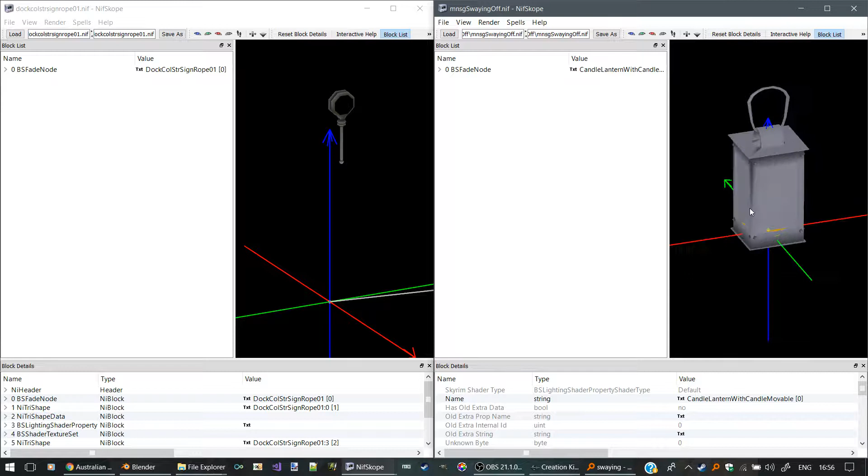Now we've got a few things open. We've got a swaying lantern from my lanterns mod, a piece of rope from the creation kit, and an ETAC lantern that we want to put on the end of that rope to make it sway. So let's start with this rope.

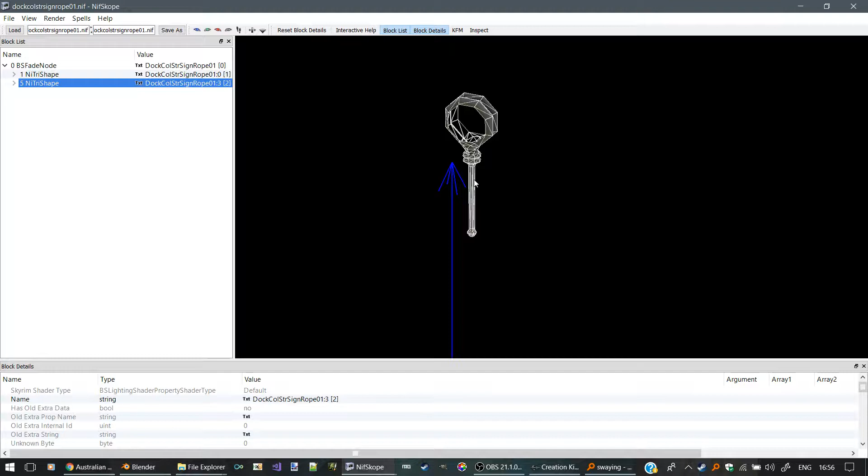We need to split this up because we don't want the whole thing to sway, just the stick of rope at the bottom, while the top remains static. So first we'll check the transformations, and that's quite horrible.

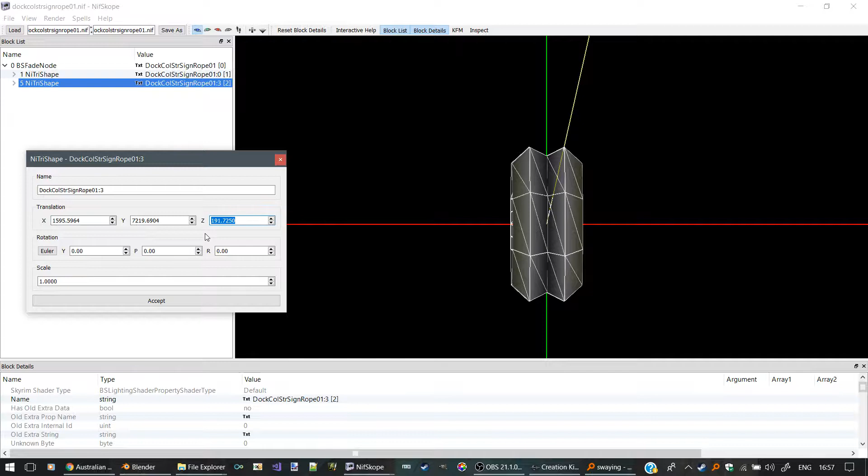If we export these numbers into Blender, or this model into Blender, it will be very hard to work with. So we'll move this into the middle, like so. Okay, how's that? That's pretty good. And then we'll apply that transformation.

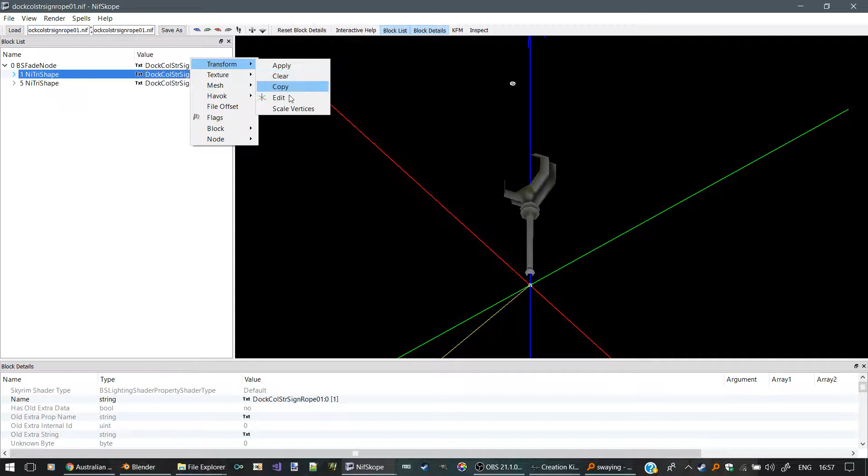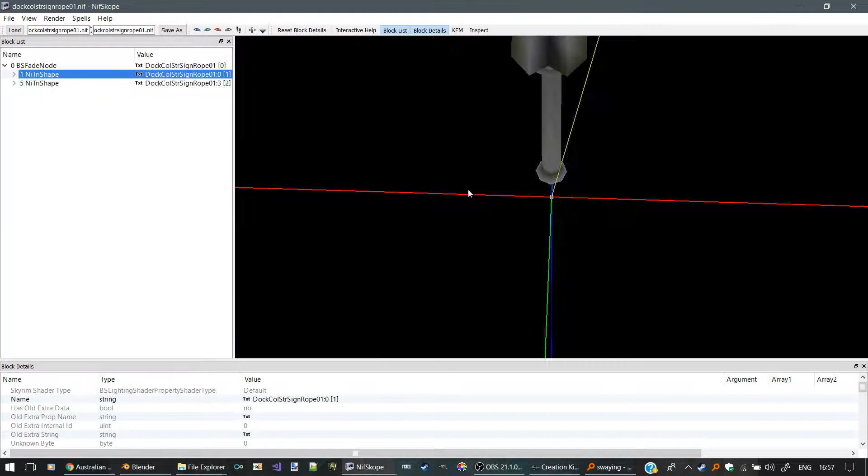Now there's also a little end cap that goes here, currently stuck up there. So let's try and grab that. I'm not too worried about this little thing, but if you were doing this carefully, it would be important to make sure you got all the elements of the mesh that you wanted. Okay, there we go, that's pretty good.

But we'll just be sticking with this big piece for now. So we want to export that. Okay, my new rope object. We'll copy over that, and then we'll bring that into Blender.

My new rope, make sure the axes are right. Okay, there it is. Now we want to get into that, and we want to split this up. So let's take all of these points and we'll separate those out to a separate object.

Okay, we'll stretch these up a bit, and we'll stretch this side down a bit, and that's just so that when it sways, we won't have any big gaps opening up between the two rope elements. Okay, so let's get these back into NifSkope.

Export as 3ds. Here's the top, and we want only that selection. And the bottom. Here's our bottom. Okay, so we've got our two elements now.

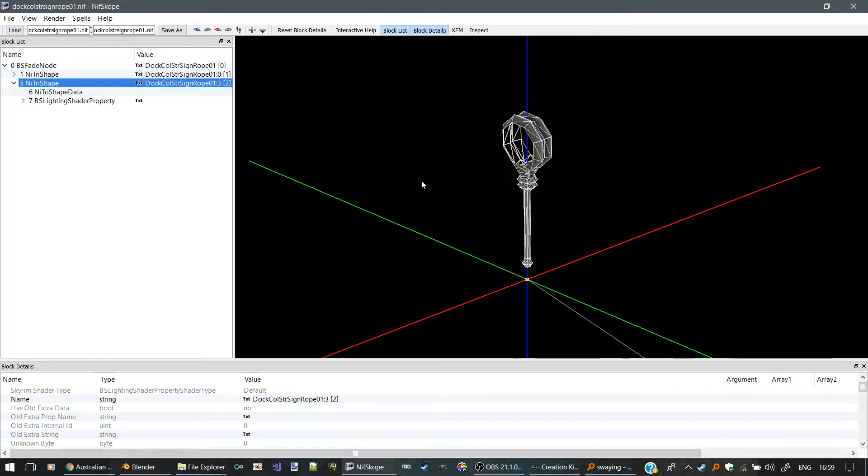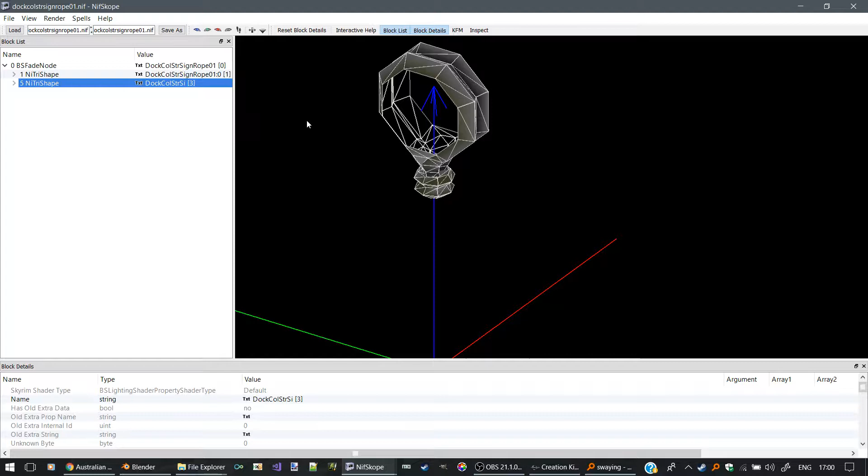Okay, and let's bring one of them back into here. Bring in our top element. Right, there's our top element, and we want to keep that handy because that's going to be our static element that goes at the top.

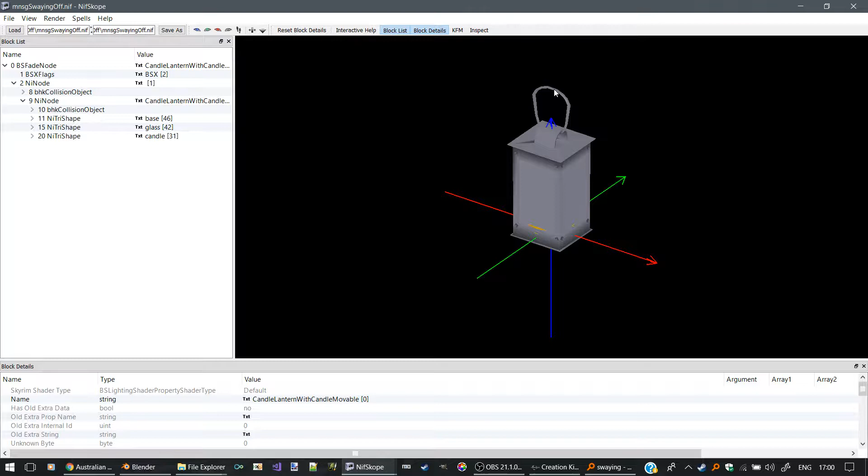Now let's have a look at our lantern here. And I know that when my lantern sways, the pivot point is up here, just inside the loop. So I want to keep that lantern case in there for as long as I can so that I can use that as a reference.

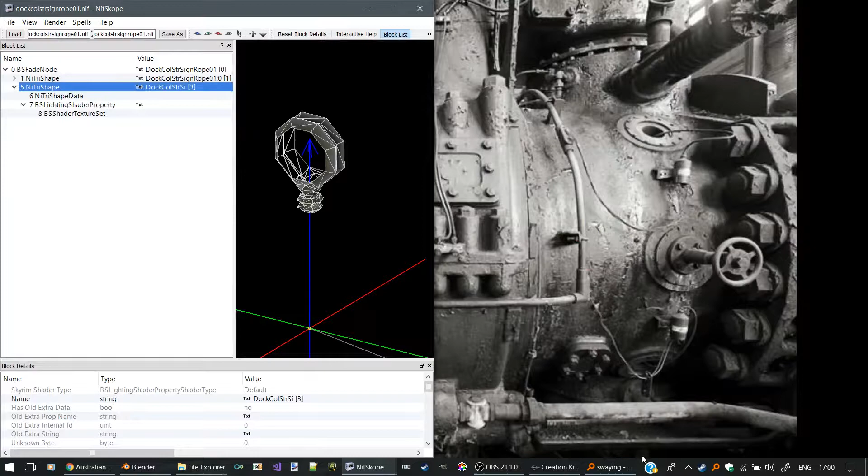But I can get rid of the candle, and I can get rid of the glass. Okay, whoops, oh wrong one. All right, let's open that again. Okay, get rid of the glass. Get rid of the candle. Okay, there's my case.

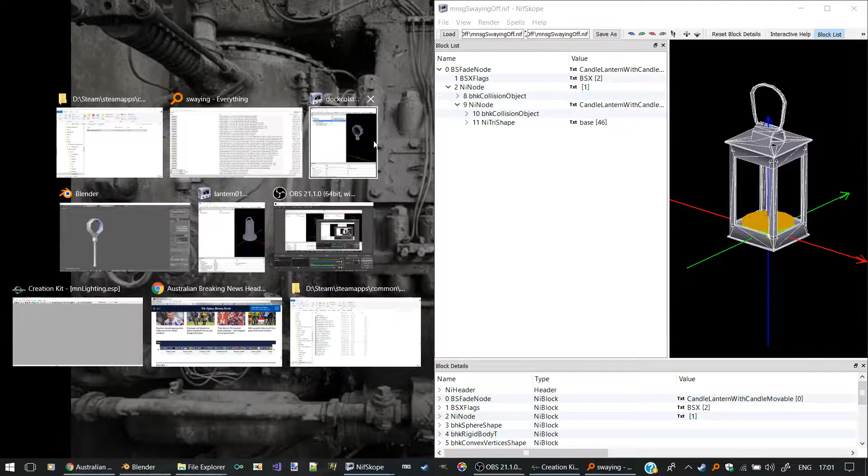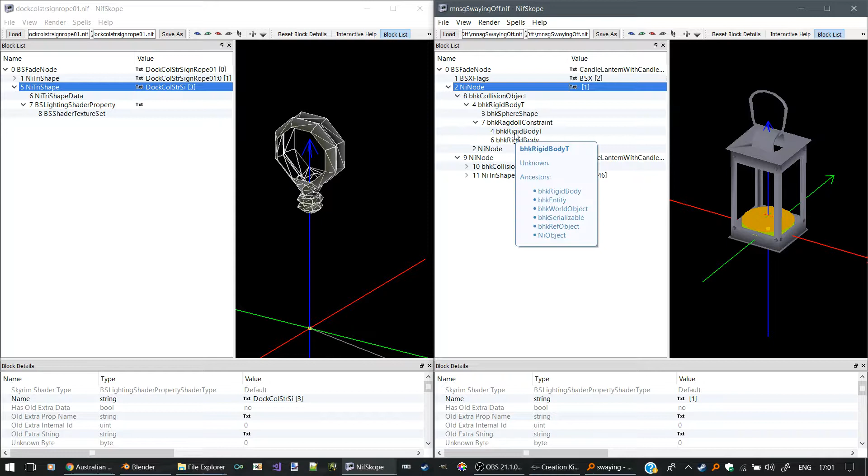Now over here we can see we've got our top node and we've got our object node. The object node includes our ragdoll, that's the disk there, that indicates a ragdoll. And it has our actual lantern object. That means that any objects we put under this node are going to be subject to the constraints of the ragdoll, and anything outside that will not be part of the ragdoll.

So if I go to my rope, I can copy that block. Okay, whoops, I'll have to update those arrays first. Okay, array update, update my normals, update my tangents, update my bitangents, and update my vertex colors. Okay, let's try that again.

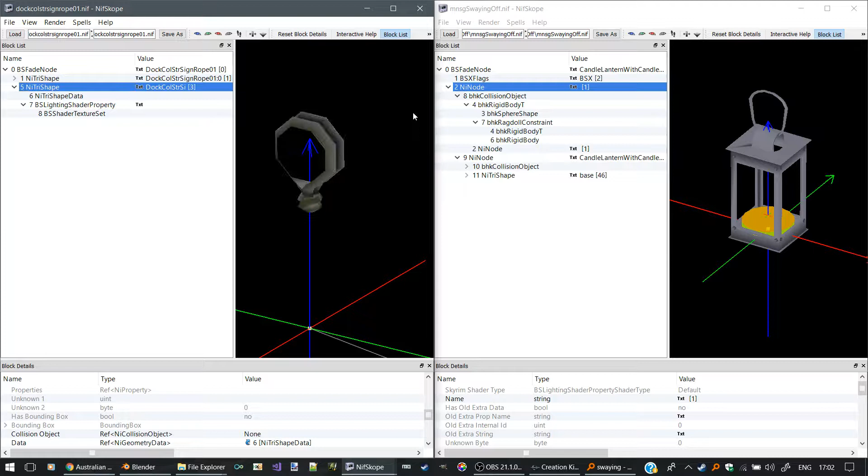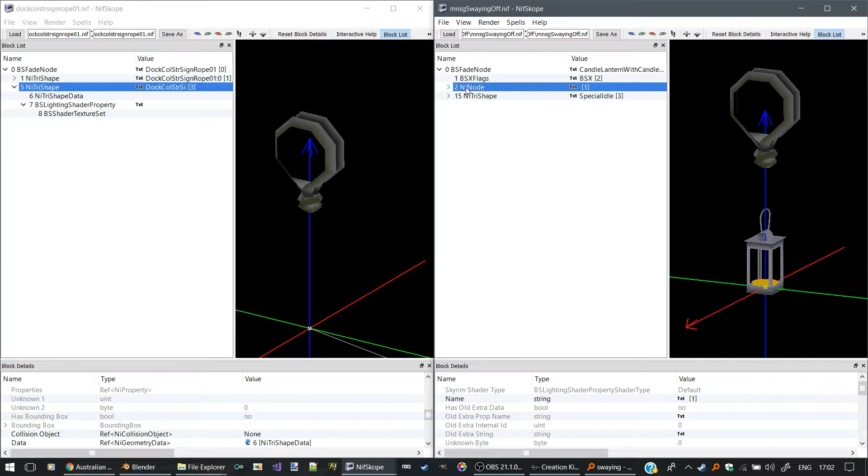Copy that branch, no problem this time. Now instead of pasting it into this object node here, which we already have, we're just going to paste it straight under the top node. Okay, and now this object, my rope, is on a separate node to my lantern, so my rope will not be subject to this ragdoll constraint.

If I were being really picky, I'd put in another collision object for that shape, but I'm not too fussed about that right now.

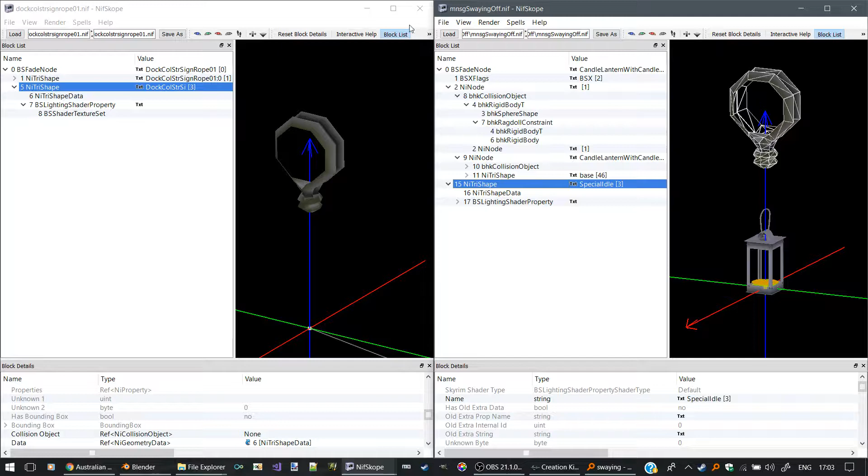So next, what we want to do is bring over our lantern and also bring over the rest of this rope. So let's get this rope where it needs to be first.

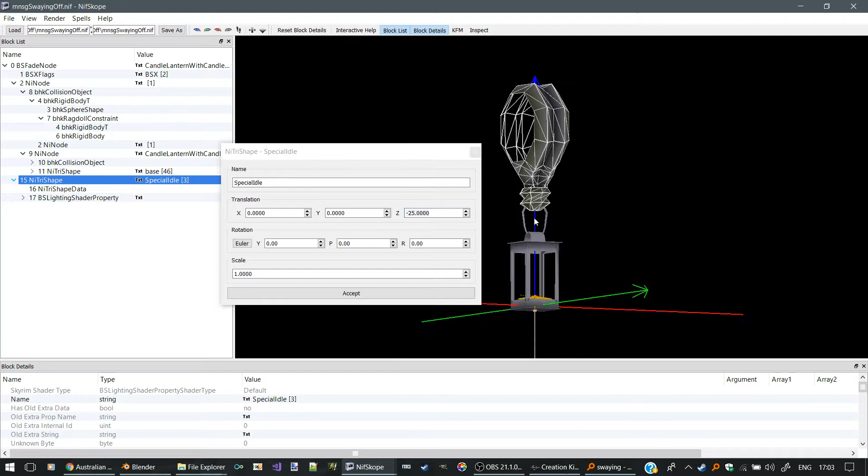And it needs to be in just the right place to match the pivot point of the existing ragdoll. So we'll put it down to about there, so minus 25 down.

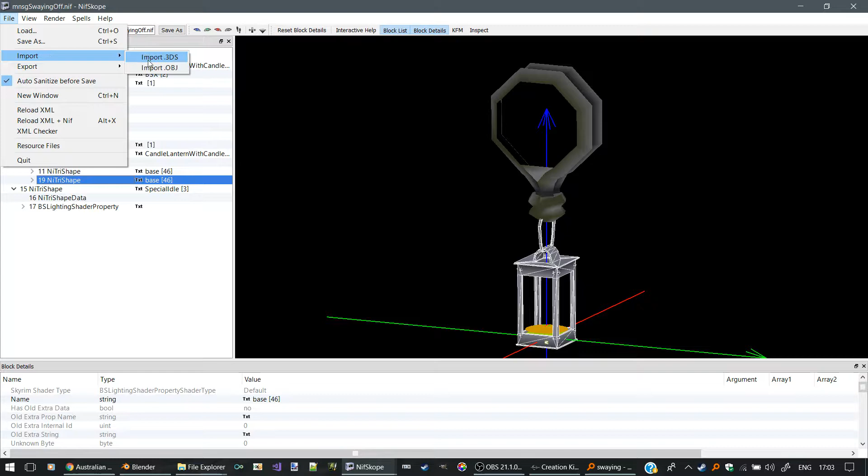Okay, then we want to take our lantern node, or our lantern shape, make a copy of it, and paste it into the same node. Okay, and then we want to import our lower rope section into there.

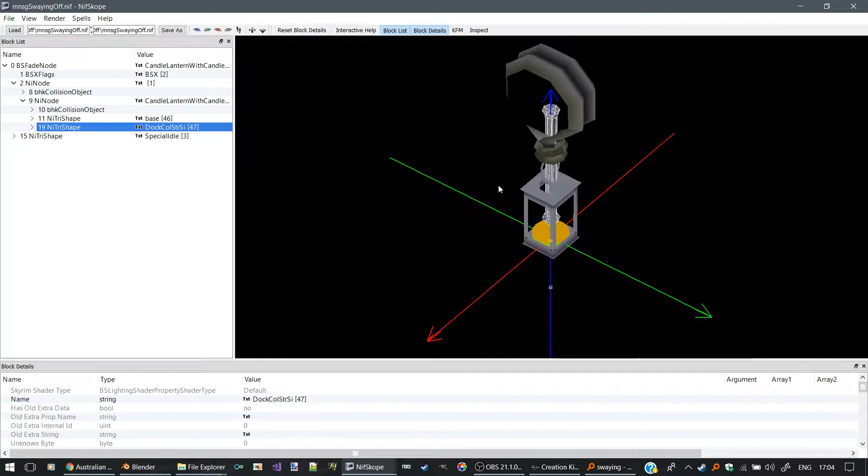So all we've really done is taken that mesh element of the lantern that we copied and we've imported this shape over the top of it. And after we've done that, of course, we would have to fix up all the textures and so on as well.

Okay, bring that down. How does that look? That's not quite in the right place. Push that back up a little bit. That looks pretty good.

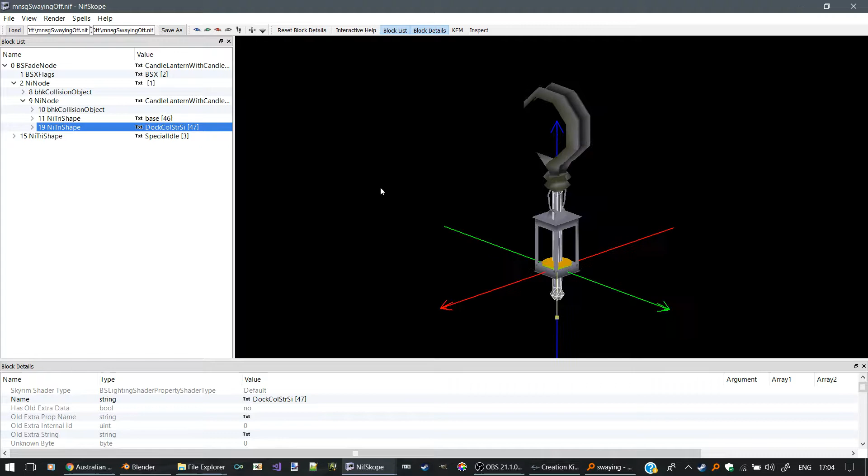So there's our rope, and you can see we put that length of rope, which we want to actually sway or swing, inside this node that is controlled by the ragdoll. That's that parent node there, which includes our swaying rope.

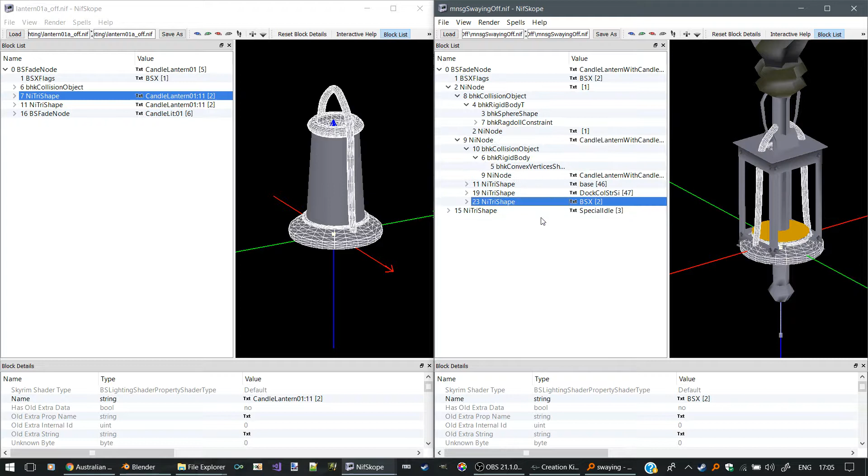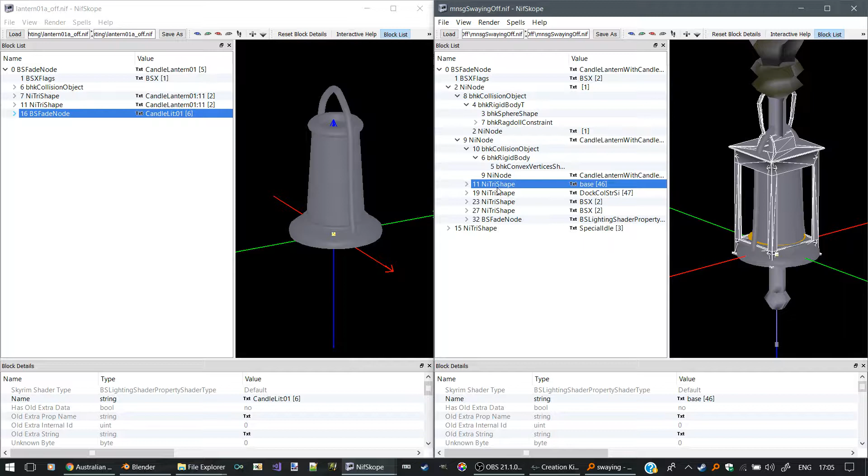Now we want to add our lantern elements, which is very easy. We take that shape, copy, and we want it to be in the same ragdoll node. So paste that. We'll take our glass, paste that, and we'll take our candle, paste that. Okay, now we can get rid of this old lantern base, we don't need that anymore.

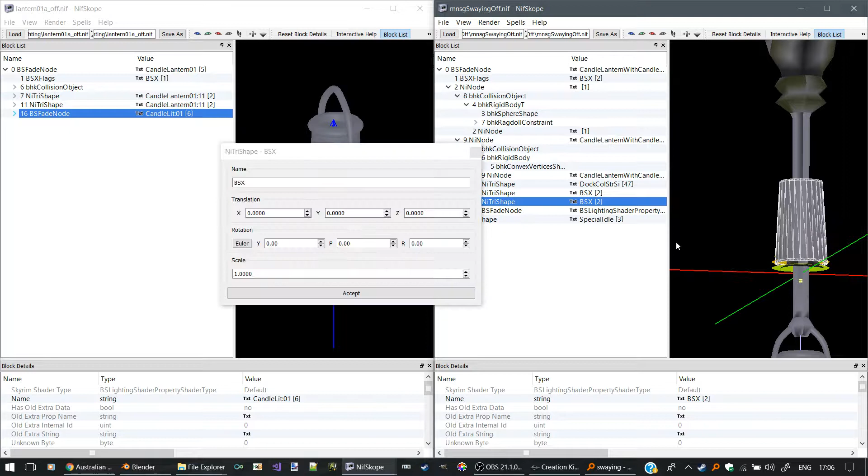Let's take this, move it down a bit further. Okay, that looks pretty good. So that's minus 44. Means we'll move this down -44, and we'll move the candle down -44 as well, so make sure all those elements stay together.

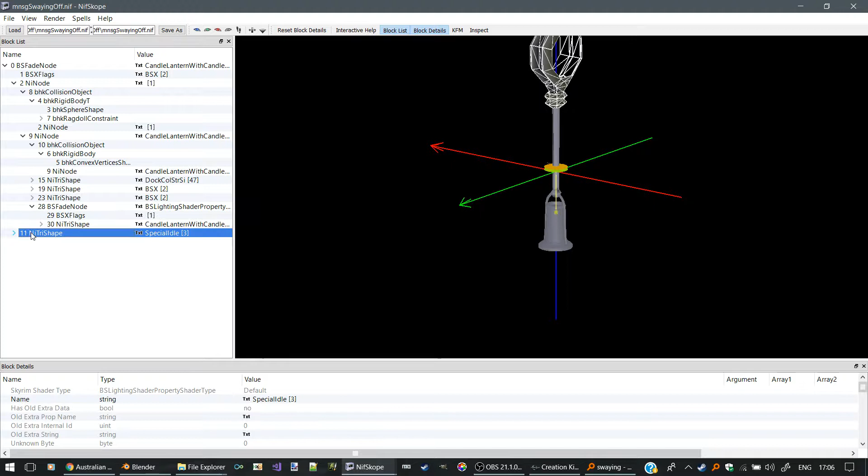Okay, and then we have it. So now, once again, here's our static node at the top, and everything under this node is going to be subject to the ragdoll. So that's our rope, lantern, glass, and the candle as well.

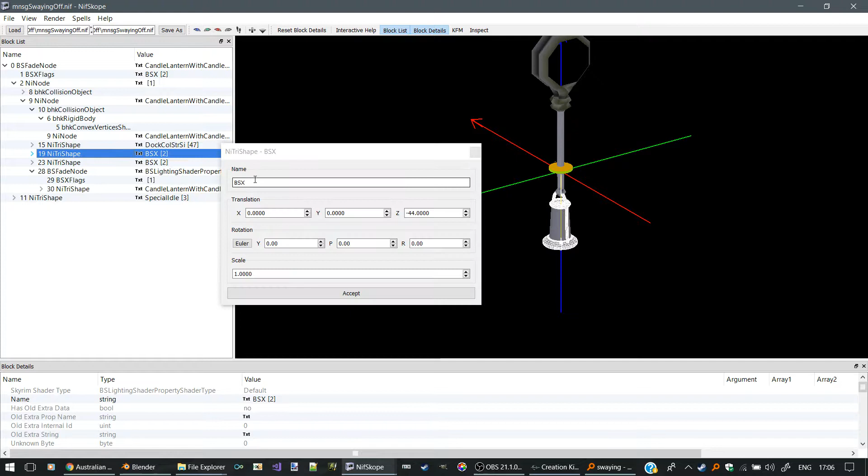Let's just check these names, because if these name fields are blank, you're going to get a crash when you try to use that mesh in the game. As long as there's something in there, we're not too worried. If I were worried, I would actually make meaningful names, but I'm not that fussed, frankly, just for this.

So let's put this in our meshes. Okay, we'll call this our new swaying lantern. Save that. Go to the creation kit. Find something that's already swaying, and make it our new swaying lantern.

We'll find that mesh that we just had. Here it is, new swaying lantern mesh. Okay, and you see the texture is missing there because we didn't bother putting in any textures, so we'll have to go back and do that later. Create a new form, definitely.

Let's just open anything really. We can put this inside a house, it doesn't really matter. Just for the purposes of demonstration, here's a nice beam that we can use. We'll take our new swaying lantern, put it there. Now, actually, I'm not sure if the weather is going to give us enough wind to make this move inside someone's house. There's our new lantern.

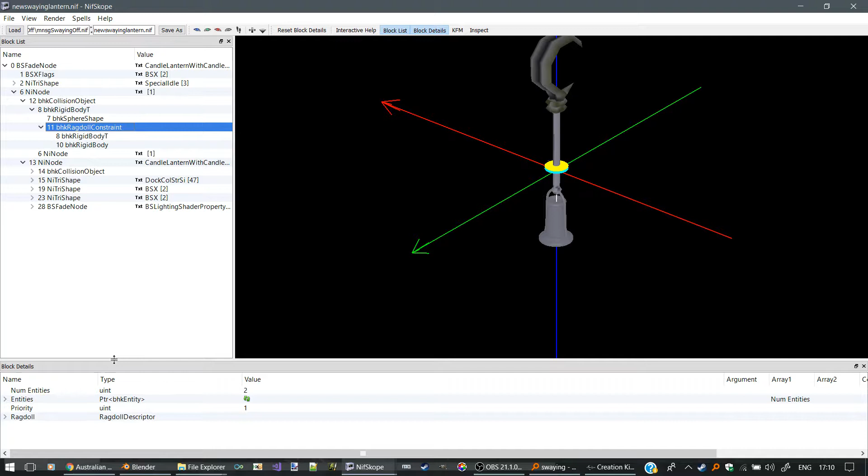So we've got the twist angles, so here we go, most of them will be in the rigid body settings. We've got our restitution force, maximum velocities, angular, and so on. We've got some damping. So for a pendulum like that, you'd want fairly low damping.

We would want... there's all sorts of things to play with here. There's time constants. What's that other one? There we go, time factors, which can affect the period. You've got the mass. Okay, so this is the rigid body, not the T, but the other rigid body is the one that makes the most sense to play with.

So just try playing with things like the mass, the damping forces, and the time factors, even the friction if you want it to keep swinging freely. And you can get your pendulum to work nicely and realistically, because Skyrim doesn't really have a physics simulator, it's more of a physics emulator. But it does a pretty good job, so you just want to slow that pendulum down a bit if you can. But it works. That's a swaying pendulum. So I hope that helps, and have fun.